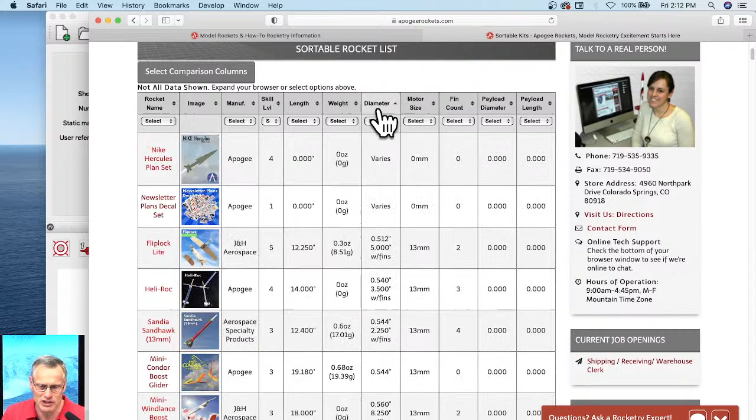So if you're looking for a particular diameter rocket, click on diameter. So then it sorts it from the skinniest to the biggest, and then you could just scroll down. Let's say I'm interested in a 4-inch rocket. So I just keep scrolling down. I'm looking in this column right here for a 4-inch, so I'm not there yet. It's going to be near the bottom. 2-inch, 3-inch. Okay, so now I'm in the 4-inch diameter section right here. So now I could start looking for something that strikes my fancy.

If you want a really cool kit, I would get the Apogee Zephyr, and then you can click on that and it'll take you to the Zephyr page. This is a 4-inch diameter rocket. This is a really good rocket if you want to get your level 1 certification. You can click on the images here and it gives you bigger images so you can see what they look like. You can see that's a big 4-inch diameter kit.

So, Neil, we don't have a catalog, but everything's on the website and you can look at it on your phone while you're in the bathroom, which a lot of people do, they're paging through something or they're scrolling. That's the reading room, right?

Anyway, back to this. So there's two ways to do this. One way is to create a design file for each of the different configurations, and personally, that's what I would do. But some people want to just minimize the number of things that are stored on their computer. So they want just one design file, and then they want to swap engine mounts between that. And so what's the fast way to do it that way?

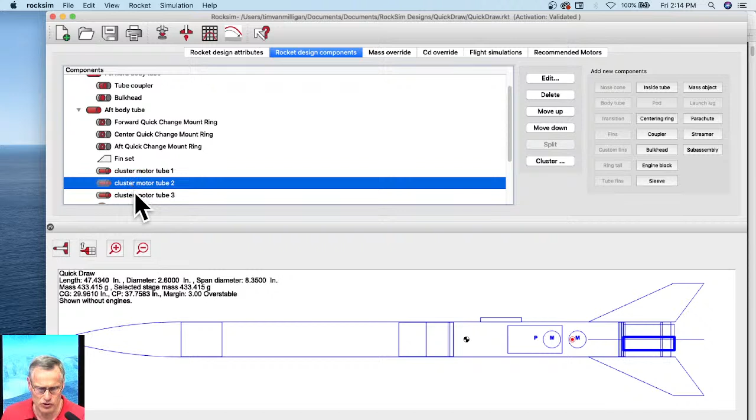So right now this rocket has a cluster of 3 engine mounts in the back. And if I go to the rocket design components tab right here, this lists a parts tree of all the components in the rocket. And if I click on the aft body tube right here, it will expand it, and you can see there's a lot more parts down here. So I have cluster motor mount tube number 1, number 2, and number 3. I've got a whole bunch of centering rings in the front and removable centering rings back here. We've got a lot of stuff, and so we're going to add all this stuff to a sub-assembly.

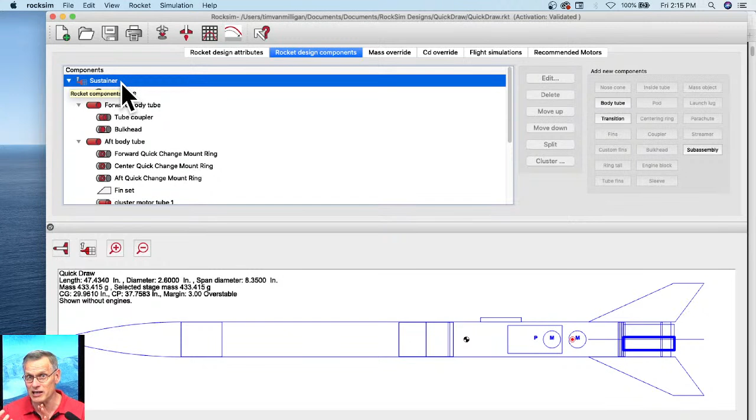So what is a sub-assembly? Consider it like a collection of parts. If you're in the parts tree right here, if I collapse this, this is a collection of parts. And so a sub-assembly is going to be another collection of parts. And then the nice thing about it is I can save it like I save a design, and I can take it and put it into a different rocket.

So the process of doing sub-assemblies is first we're going to create the part holder, the container, like this sustainer right up here. We're going to create that first. Then we're going to add parts to it. And then once we get all the parts added to it, we're going to save that. And then we can go into a different design and load in that sub-assembly file into the rocket.

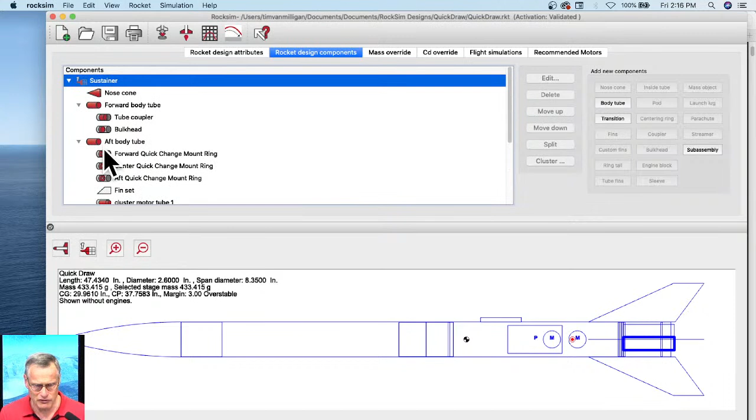So first you have to specify where in the rocket you're going to put it. Because it's a sub-assembly, really it could be anywhere. But I'm going to put it down here in the bottom of the rocket because that's where my mental imagery is of this sub-assembly. So I have to find a part that I can add it to, and you'll see over here on the right side there's a button at the very bottom called sub-assembly.

And if you click on the wrong component, you can see that it's grayed out, that I can't add it. So I can only add it to certain items, like body tubes. I can add it to a nose cone. I can't add it into a coupler. I can add it into another tube, but not a coupler. So I'm going to add it to this tube right here, the aft body tube. So I need to highlight it, then come over here to sub-assembly, and click on that.

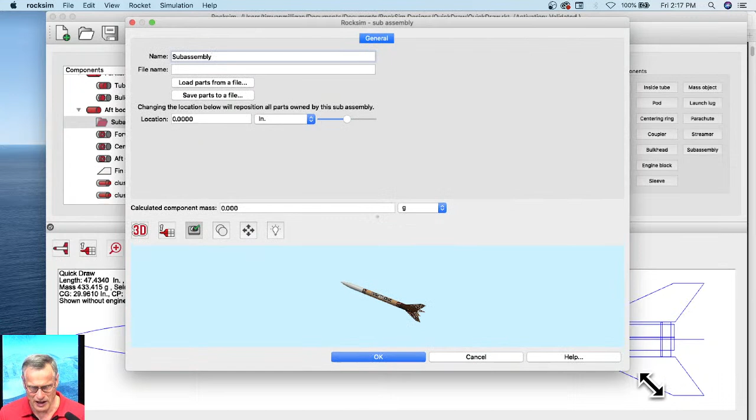And it's going to give me an alert that says, is the new sub-assembly to be owned by the selected body tube? And I'm going to say, yeah, the body tube owns it. Okay, so now it created it, and it's thinking about it. Then it brings up this screen right here, and this is where we're going to name our sub-assembly. I'm going to start out with a single engine motor mount, so I'm going to call it 1 by 29 millimeter quick change motor mount.

And I can give it a file name. I can load parts from a file or save parts to a file, but right now I'm just going to leave that alone. And it's asking me for a location. If I click on 2D, it's going to be somewhere in here. Right now you can't tell where it is, but we'll see it later, and I can change the location later. I think right now it's right at the front of the tube, which is right here in the middle of this tube coupler.

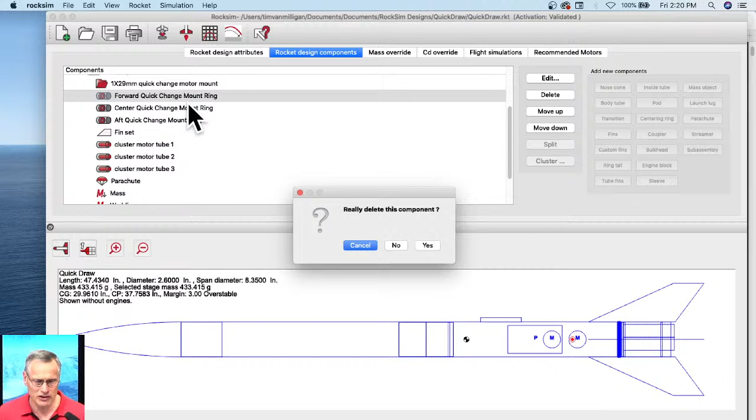So I'm going to do a cut of this part. When you do a cut, it actually saves it to temporary memory, and then you can paste it. So I'm going to do a cut. And it's going to say, do you really want to do this? I'm going to say yes. So I took that out, and now I'm going to highlight the folder here, and I'm going to say paste. To get this little menu, I right-clicked with my mouse and hit paste. And you can see now it put that ring that used to be here up into here.

So I'm going to do the same thing with this one. Cut, say yes, come up here and paste. And it pasted it in. I'm going to do the same thing with this one. Cut, yes, and paste. Okay, so it pasted it in there.

The fins, I'm not going to put in the sub-assembly, and not these cluster tubes, because I'm going to go from a 3-engine cluster to a single 29 millimeter, so I don't want that. But looking at this motor mount tube, right here there were 3 rings at the front. They're just stacked up together, and then there's 1 ring in the back, so I want that ring. It says aft removable mount centering ring, so there it is right there, so I want that one.

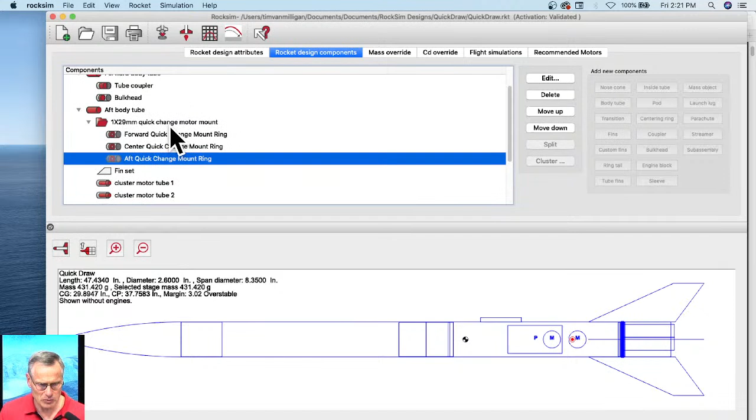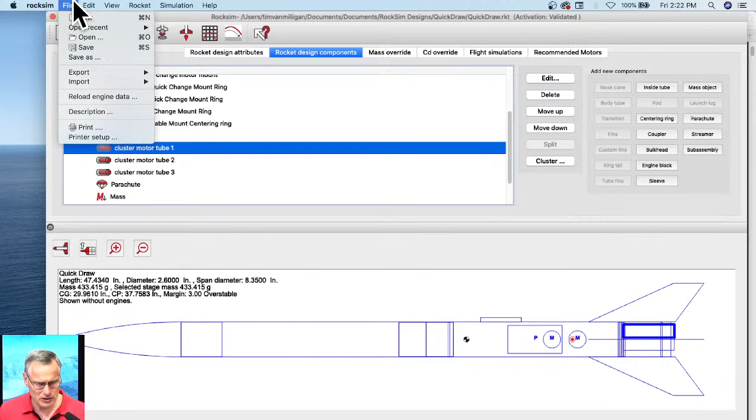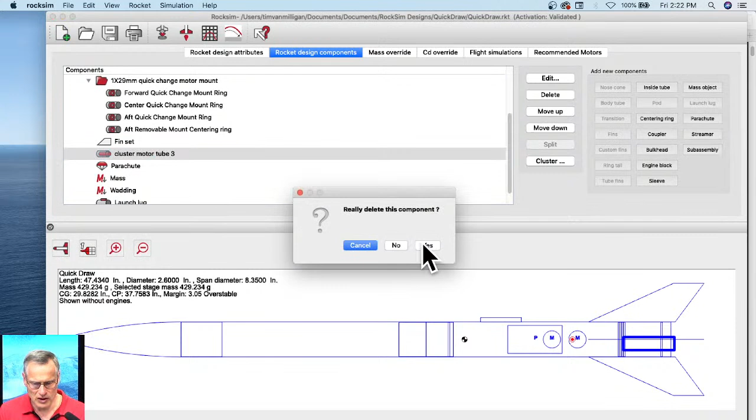So I'm going to cut, say yes, come back up here to the folder, highlight it, and paste, and it pasted it back in. And I think that's all that I want. Now I'm going to delete these 3 cluster tubes right here because I don't need them. So I'm going to do file, delete. I can do a cut or a delete, either one. Delete that, yes. Delete that one, yes. And then delete the 3rd one, delete, yes.

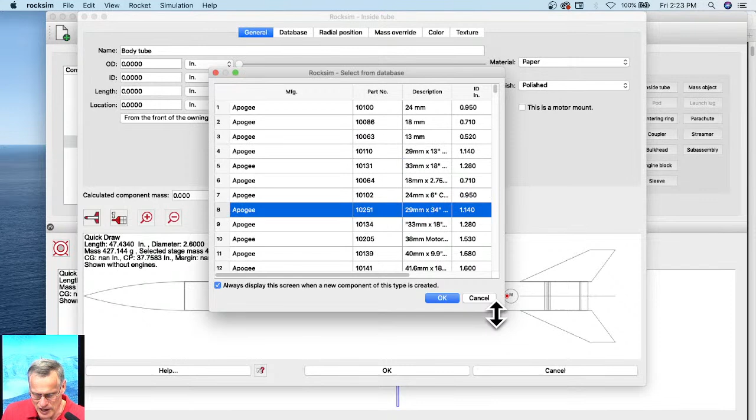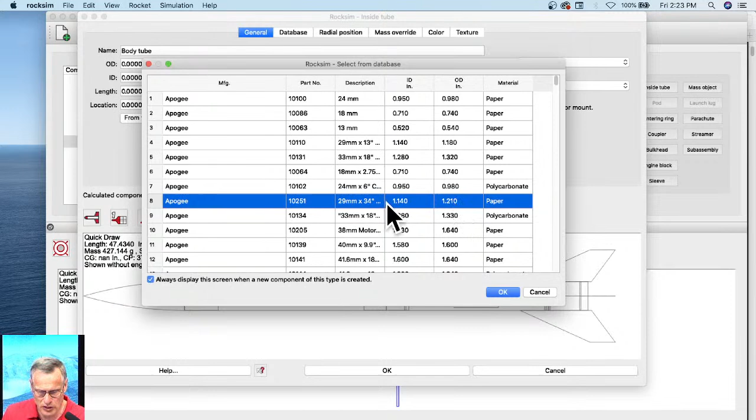And now I need a 29 millimeter motor mount tube. So I don't want that one. I want this one right here, because I know from Apogee that one is a thin walled tube. So the outside diameter is 1.18. This one down here is 1.21, so it's a little bit thicker, because on this particular rocket kit we used a thick wall tube.

So I'm going to say OK to that, and you can see that it put that tube way up there. So here's my tube in blue, and here's my rings right here. These centering rings are positioned back from the tube, and that's probably going to cause a problem. It's not so much a problem, it's just going to cause extra work in the future.

So what I really should have done was move those rings all the way up to the front here at the start of the sub-assembly, because right now they're back here. I'll just go ahead and leave them back here, and then I'll show you where the extra work is going to come. So on this motor mount tube, first I want to move the location. I'm going to slide it back so it's at the front of those rings right there. I think it's like right there.

And then the length, and I think the length is 3.75 inches, because I think the 29s are the same as the 24s, and in the 24s we use 3.75 inches long on that tube.

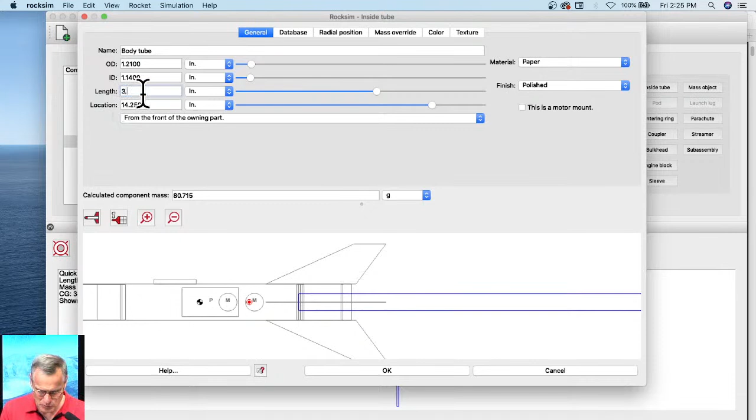So 3.75 inches, and so there's that tube. Let me zoom in so you can see that tube. That's the correct length. That's good. And this is a motor mount tube, and you can see it already selected 29 millimeters. I kind of knew that.

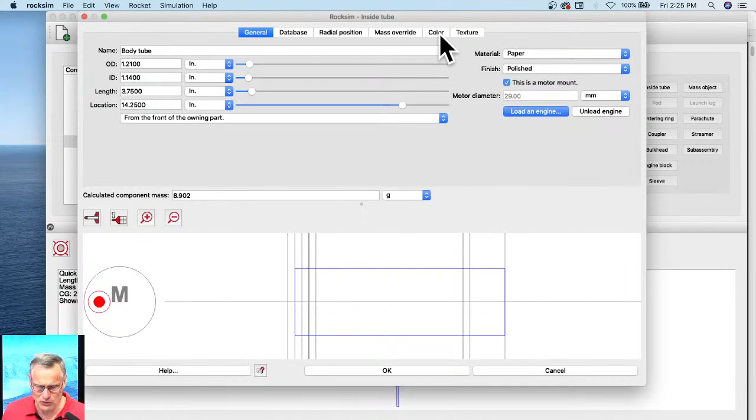I can change the color here if I want. I think I'll change the 2D color at least. Make it purple. And my 3D color is white. I'll just leave that. And click OK. So now we're looking at the back end. Let's look at it from the side view.

So there is that motor mount tube. Also on the motor mount tube is an engine retainer. On this one we used a threaded rod retainer. So let me show you a picture of what that looks like. Let's go to quick change.

Okay, so here are the motor mounts. Let me go to this one. Actually, see, that's a 3x24. I need a 1x29. Here's the 1x29. Click OK. So there that is. And if you click on it, what you see here is this right here. That's a threaded rod, and we bond it to the tube with epoxy. And that holds your rocket motor into the rocket.

If I look at it from the rear view, you can see that there's the rod, and then it's got a little nut and a washer that captures the back end of the motor and prevents it from sliding out. This works really good, and they're cheap. They're cheaper than a screw-on retainer, which is why we used it. We're just trying to keep the cost down.

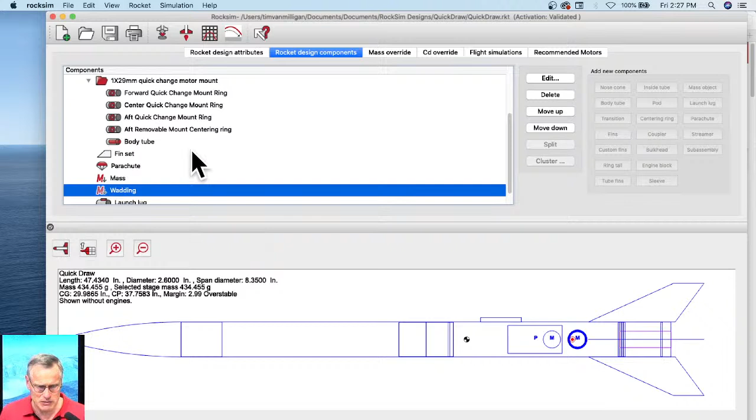So I'm going to come up here again because it's inside of my quick change motor mount, and I'm going to go to a mass object, and I'm going to ignore the database, and the mass object right now is right there. We're going to call it 12 grams, and we're going to move it. I'm sliding it back to about right there where it would probably balance in the rocket. And let me call this the threaded rod retainer. And I'll click OK. So there it is.

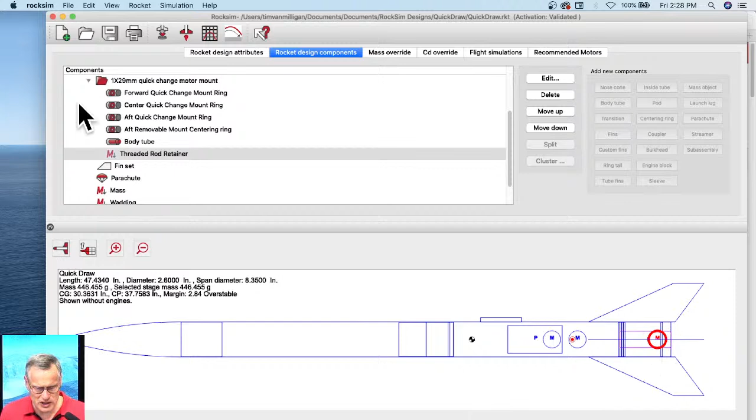So at this point, my quick change motor mount is ready to save. So I'm going to come back up here to the quick change motor mount collection of parts, and I'm going to double click on it, and now we're going to save it. And so now I need to give it a file name, and I'm going to call it the same as the actual name so I can find it. And then you're going to save parts to the file.

So I'm going to do save, and it looks into the last folder that I was looking at. So I'm going to paste in that name again. It should have pasted in there. Oh, it doesn't want to let me paste it. 1x29 millimeter quick change motor mount sub-assembly, and I'll hit save. Holy cow, look at that.

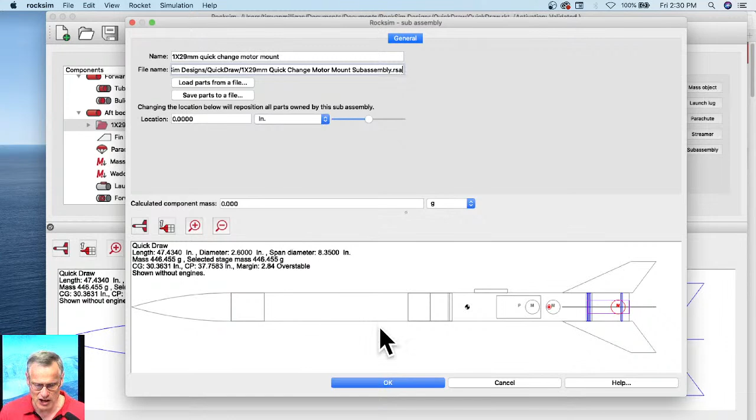Oh, okay, what it was looking for here was the file path. So this is the entire file path. So on my computer, it's in the users, Tim Van Milligan documents. Inside of there is documents, RockSim designs, quick draw, and then the file name, 1 by 29 millimeter quick change motor mount sub-assembly, and then it adds a file extension RSA, which stands for RockSim assembly or RockSim sub-assembly. So it's been saved, and I click OK.

At this point, we can run some simulations. I'm going to just do a save as, because I want to just hold my thing here. So I'm going to call this quick draw 1 by 29 millimeter, so I know what it is, so I don't override the one that I downloaded from the website. Okay. So we can run a simulation here. So now when I go to load motors, I should only see one motor mount tube in here. And I'm going to choose an engine, and I'll just randomly select something.

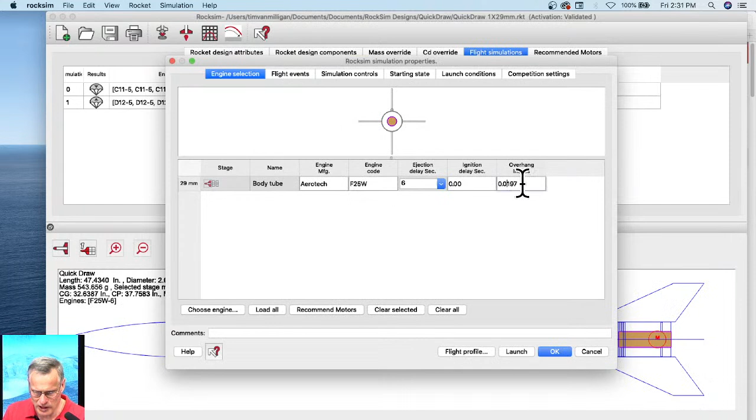Aerotech. Let me sort by engine code. I want to get an F motor, so let's do an F25. Maybe a 6-second delay. Click OK. Engine overhang. I think with this engine mount system, it's going to overhang 0.25 inches, a quarter inch, because that's the thickness of the thrust ring that's on the back of the rocket engine.

Now just seeing what we got here for flight events. Deploying at maximum ejection delay. We're going straight up. And let's launch it and see what it looks like, just to confirm everything is working. So here's the rocket on the launch pad. These black lines right here are called the weathercocking cone. This kind of tells us if the rocket's going in the direction we want.

We want the apogee point to be somewhere up in here. And let's see, when we launch it, the rocket goes pretty straight. That's pretty good. You can see this is the smoke, and it's drifting a little bit. So there's a little bit of wind in this simulation, but not much. And the apogee point was within the cone. So that's a good flight, and it deployed the parachute pretty close to apogee, so I like that also. I picked my delay pretty good.

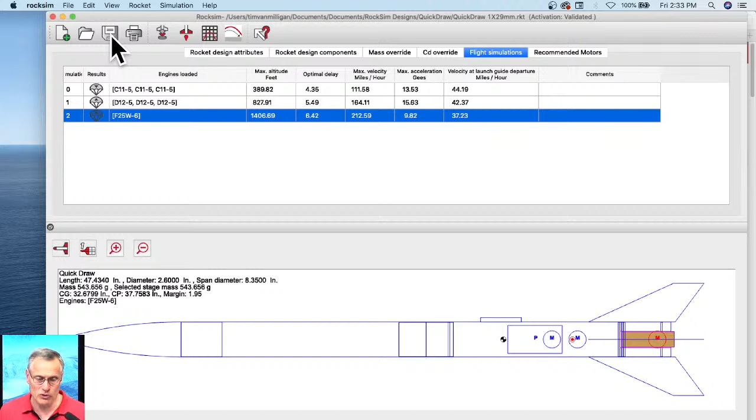And then it's coming down, and it's going to land about 374 feet downrange with a total flight time of just about 70 seconds. So that simulation worked just fine. Okay, so now let's go and create a new design and bring this sub-assembly into this new design. So I'm going to start out by creating a new design, and I'm just going to do a very simple design.

If you're brand new to RockSim, this is how you create a design. Come up here to new design file, click on that. It's going to ask me, do I want to save this? And I'll say yes, because I just ran a simulation. So when we design a rocket, we work along here on these tabs. I'll start with the first tab, and I'll just call it BT-80 Simple Rocket. I'm just going to leave everything else alone. Go to the next tab and start designing. So now we need to add parts to this. I'm going to add a nose cone as the first item. We kind of work from the top of the rocket coming down.

So I'm going to work with an Apogee, and I want a PNC 66, which is a BT-80. That's the hardest part of designing a rocket, is knowing the parts names. I have an advantage because I designed the parts and I know their names, but BT-80 is a standard size tube, and it's 2.6 inches in diameter. And if you convert that into millimeters, it's 66 millimeters. And so that's where this nose cone came in. You can see the diameter here at 2.6 inches. I like the nose cone, so I'm just going to say OK.

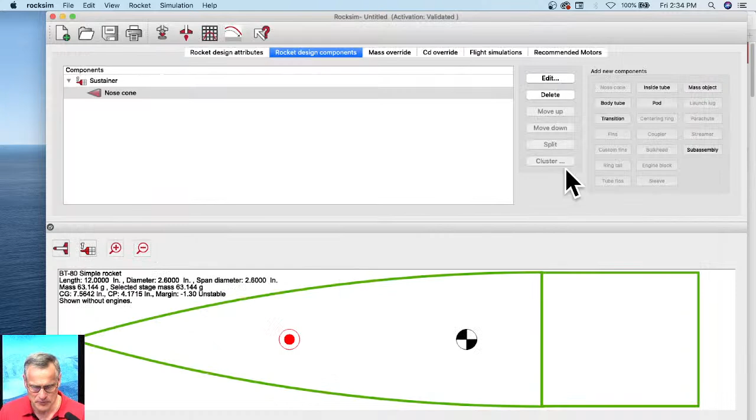Now I'm going to put in a body tube next to that. And again, I need a 66 millimeter or BT-80. So here's a 66 millimeter. I'm going to select that, and it threw that tube in there. It's going to be a little bit short, so I'm just going to lengthen it a little bit just by grabbing the slider. So I'm at 24.75 and I like it, so I'm going to click OK. Let's put some fins on there real quick. So I have 4 choices of fins. I have trapezoid and ellipticals, which are under the fins button.

Custom fins are fins that have an oddball shape. So if I look at this fin right here, it looks like a trapezoid, but you can see it's got a nice curve right there and a nice curve at the back end down here. So that's not a trapezoid. So I can't use fins. I'd have to use custom fins if I wanted to do something like that. But for now, I'm just going to use regular fins. And then you also could put a ringtail on it, which is a ring around the outside diameter of the rocket. Those are really stable. Or you could put tube fins, which is a collection of smaller tubes glued directly to the inside core tube.

I'm just going to do a regular fin, and this will be a simple trapezoid fin. Again, when you create a new part, it always looks in the database, so I'm going to ignore that. And it throws a generic fin on there. And if you like the shape of that, you can leave it alone, or you can start moving these slider bars around. If I change the sweep angle, you can see it sweeps it back. And I can change the semi-span and make it skinnier, and it automatically readjusts down here. It tells me that this is a birch plywood.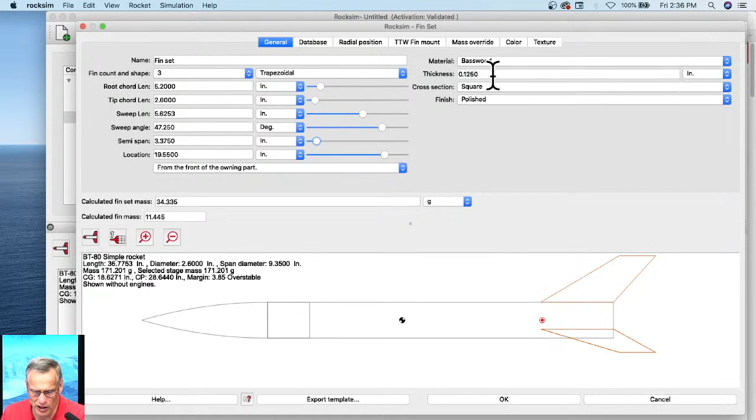I think I would probably like basswood, which is a little bit lighter weight, but not quite as strong as plywood. And if you like that, you click OK. So now we have a generic rocket, and now we're going to add that motor mount into it.

So here's where I'm going to add in a sub-assembly. So this is a new rocket design. I'm going to come over here to sub-assembly. So I'm going to click on that, and it says, is this new sub-assembly to be owned by the selected body tube? And I'm going to say yes. And now I'm going to load parts from a file. So before we saved, now we're going to load it in. So this is where we're loading it in.

And again, it remembers that I was in the quick draw folder before, and you can see that it's looking specifically for files that end in .rsa, which is RockSim subassembly. So that's the one that I want. I'm going to click open, and you can see that it loaded it in there, except for where's my motor tube? Let's click OK. There's the motor tube.

Okay. Now, before I said that there was going to be some extra work involved, well, this is where the extra work is involved, because that motor tube and this mass object, which is right there, when we created the subassembly, they were referenced from the front of the tube. And I think the tube on the quick draw rocket, this aft tube, and right here is the dividing point, is 18 inches. And so when we created the subassembly, we were referencing from a tube that's going to be 18 inches long.

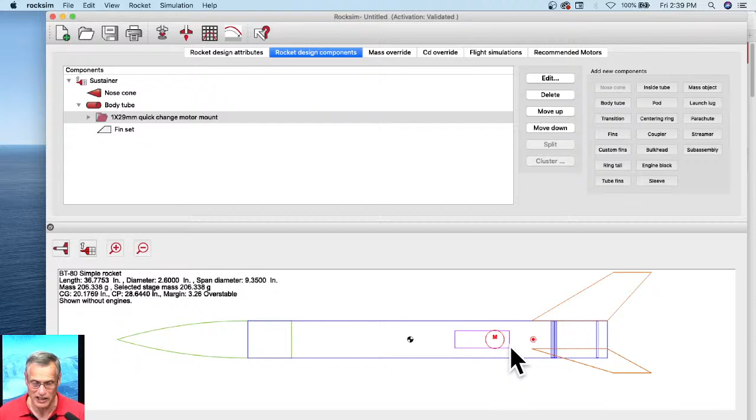But I can adjust it right here by going into the list of parts and finding that motor tube. So here's that motor tube right there. I'm going to edit that tube, and let me change the name of it. So I'm going to call it a 29 millimeter motor mount tube, and I'm going to change the location. I'm going to grab the location slider, and you'll watch it slide back, and it's sliding back to about right there where I want it, and I'm going to leave it right here.

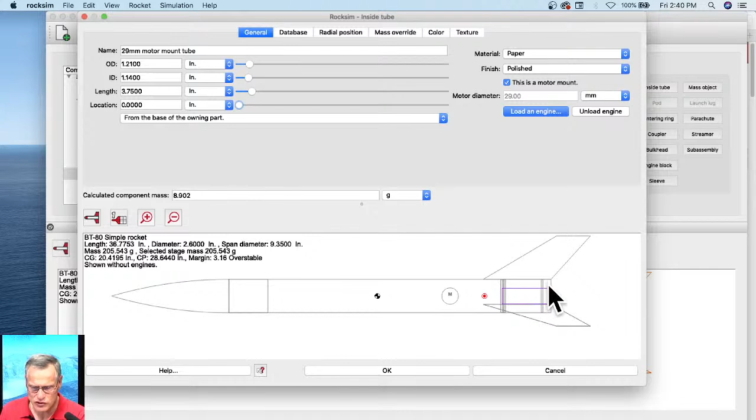I could change this to the base of the owning part, and that is actually probably a pretty good thing to do, because then if I change the length of this tube right here, that should follow it. And I have to do the same thing for the threaded rod retainer. Again, just slide it back right here. I'm going to change it to the base of the owning part, so that it's referenced now 1.125 inches from the back of the tube instead of 20 something inches from the front. So then I'm going to click OK.

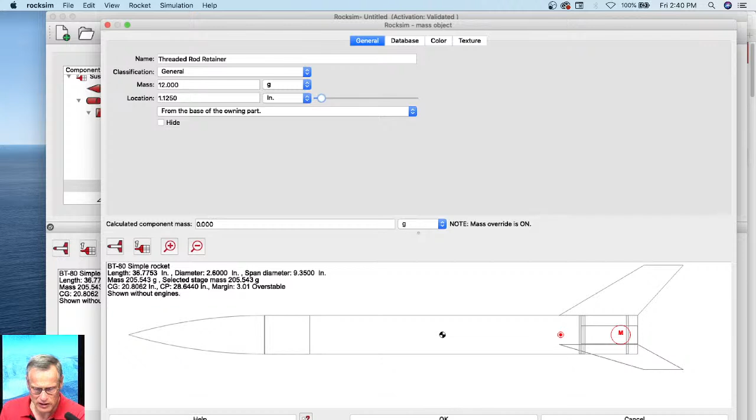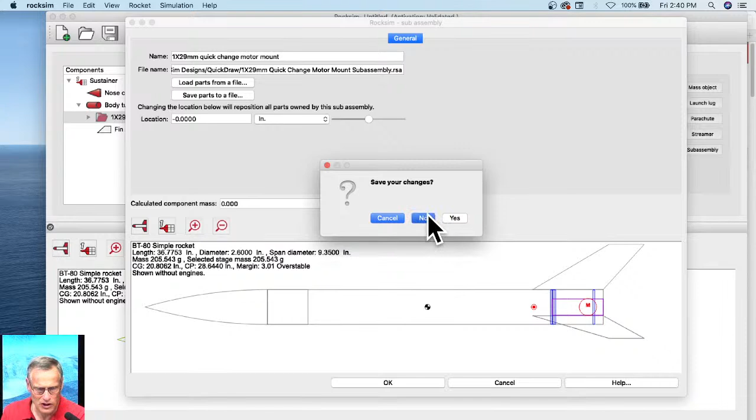So now if I open this sub-assembly right here and I change the location, you can see that everything's moving, which is good. That's what we want. Additionally, if I cancel out of that, save my changes, no, I can go to the body tube, and if I change the length of the body tube, this sub-assembly should move with it.

So if I make this tube a lot shorter, you see everything moved except for the fins, because the fins were not referenced from the back end, they were referenced from the front end. So I should have thought of that, right? I'll just move it back here and click OK. Let me go to those fins and show you where you would change that.

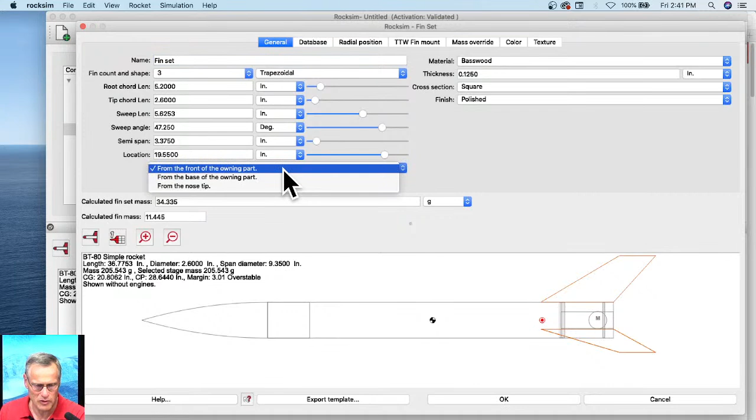So again, if I was creating those fins, edit the fins by double-clicking, and then come down here to location, and you see the drop-down menu. Right now it's from the front of the owning part, and the owning part is this tube. And I'm going to say make it from the base of the owning part, and then click OK. So now if I change the length of the body tube, everything is going to move with it. And that's called designing smart. And click OK.

Let me run a flight simulation here. So I got no flight simulations run so far. I don't have a parachute in here, so this rocket is going to crash, but we'll run it anyway. So it sees the motor mount. I'm going to say choose an engine, and I'll do an Aerotech F25 again. Make it a 9-second delay, although it doesn't have a parachute, so it's not going to do anything different.

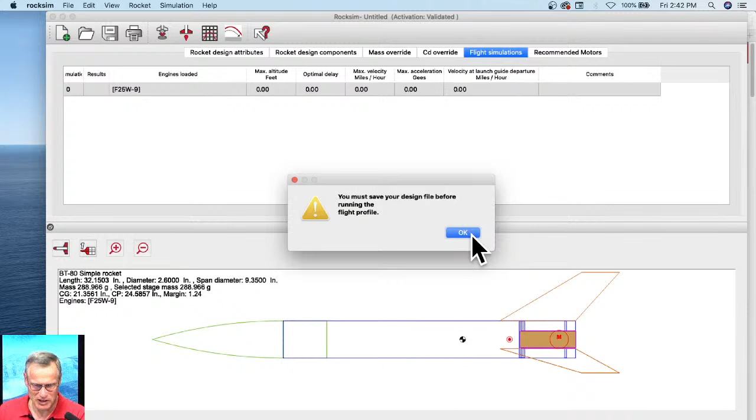It's asking me to save my design. I'm not going to put it in that folder. I'll just leave it in there. We called this the BT-80 simple rocket. Hit save. Now it runs the simulation, and we can see the rocket right here. And this one should go up and come pretty much straight down because it doesn't have a parachute in it.

Okay. Without a parachute, it's just going to come screaming down. And I'll stop it right there and drag it here. This time it only was 25 seconds in the air versus about 70 seconds previously. So again, that simulation worked. Let me go back to our original design. Let me save this one. See this right here? That means crashed rocket.

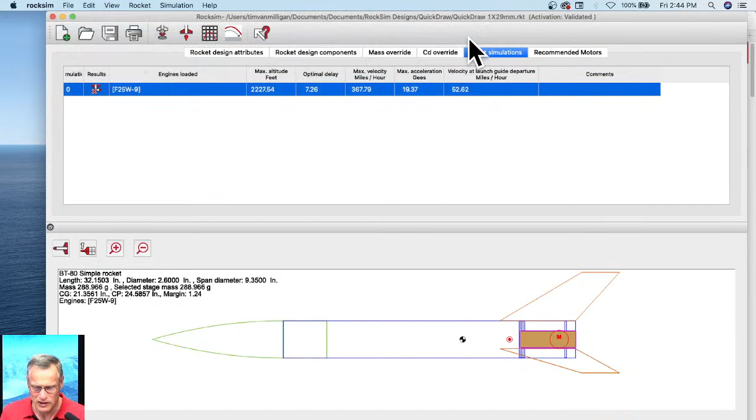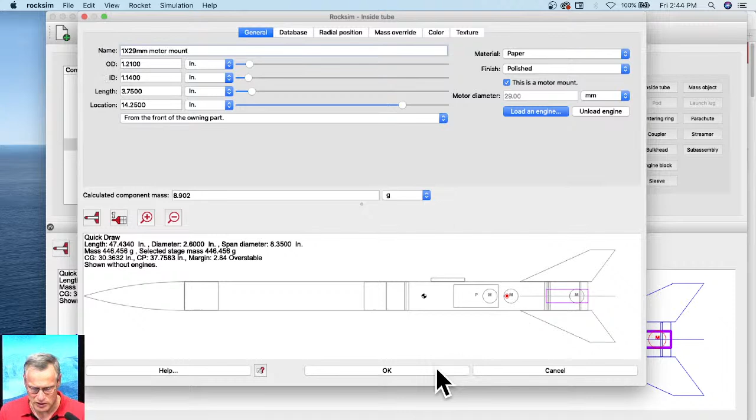I'll save that one. And I'm going to do File, Open, Recent, and we're going to look at the Quick Draw 1x29. And I want to correct that sub-assembly here, because this is our original sub-assembly. And what I want to change is those locations. So here's the body tube. Change it from the base like we did before, and we're going to call it the 1x29mm motor mount. And click OK. And then the threaded rod retainer, let's do that one as well. From the base of the owning part, click OK.

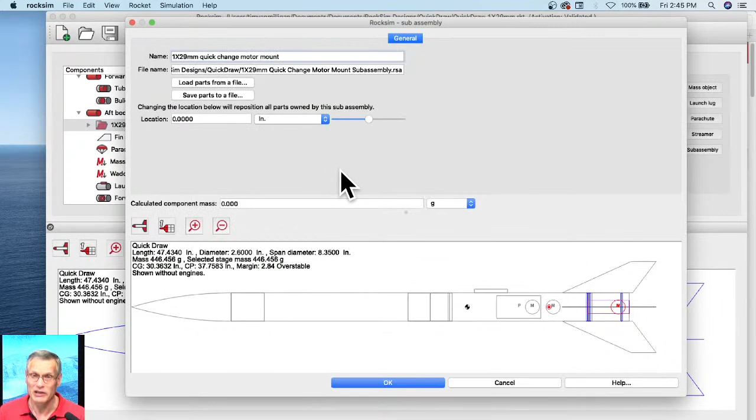And now I'm going to go back to my sub-assembly, and I'm going to save it again. And I'm going to leave everything the same. It's asking me to give it a new name, but I just clicked on it and it brought that up there. And so I should get an error message when I hit the save button that I'm overwriting this file, but that's okay. So I'm going to hit save. And there's the error message, and I'm going to replace it. So now I just replaced that subassembly. So the next time that I open it up, I can just drop it in. Okay, so now I'm going to click OK. So now we got the single 29.

My next one I want to do is a dual 29. So I'm going to have two rocket motors side by side, and they're both going to be 29. And it's really easy to do this in RockSim, because I already got the single 29 right here. So I'm going to highlight this motor mount tube right here. And now I could duplicate it. I can duplicate it two ways. I could do it like I did before, where I cut it and then added it back, like a copy paste. Or I could come over to this button right here called cluster. And this is what I recommend that you do.

Go to cluster, click on that, and it's going to launch what's called the cluster wizard. And so now we're designing a cluster engine mount, and it's going to walk us through the process. First, it's going to say select the cluster pattern. We can change the rotation of the tubes in the motor mount. We can specify naming convention for the tubes. And then finally, we'll finish by creating the new components. So click continue down here.

And I have a choice of any of these patterns. I can do a 2-engine cluster, a 4-engine cluster, which you can see is not going to fit. 6-engine cluster, 3 is not going to fit. The only one that fits is 2. So that's what I'm going to start with. And I'm going to say continue right here. And you can see I can zoom in. And these tubes don't quite touch the outside, but they're touching here on the inside. I like that pattern, so I'm going to click continue.

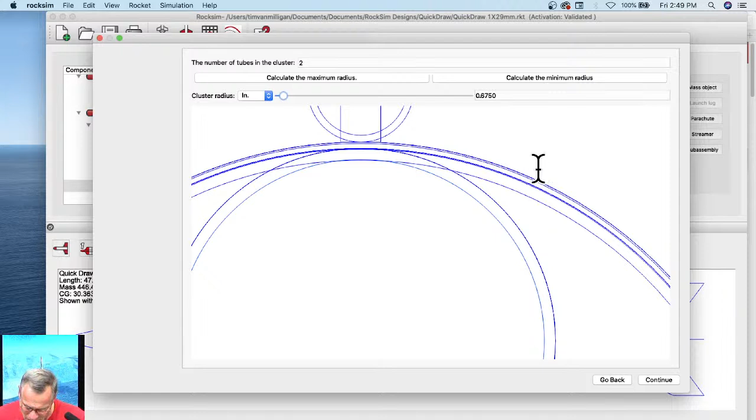And so, see, now I can change my cluster radius. I can grab this and calculate the maximum radius. See the maximum radius. You see right here, it looks like it's interfering, but this inner circle right here, that's one of my centering rings, or the tube coupler that's in the rocket. So that's what it's seeing here. My actual tube is the first, well, there. That's the inside diameter of the tube.

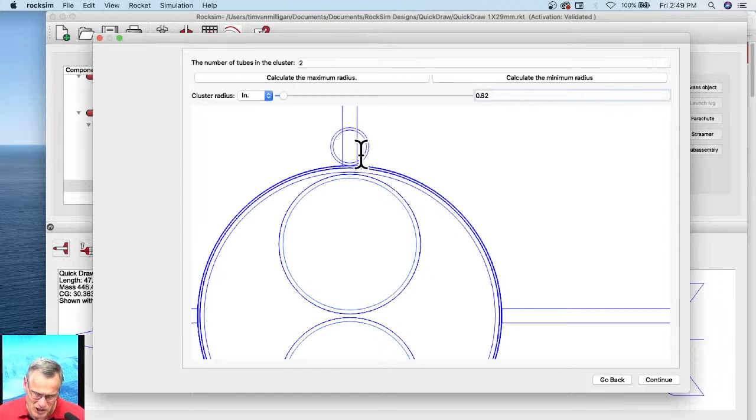So it automatically calculated that for me, and I want to bump that down just a little bit. Let's make it 0.6. So now it's 6 is not there. 0.65. I'll make it 0.62. Okay, so that looks good. I got a little bit of room there for my centering ring, and there's a little bit of room between the tubes so that I can slide in the two motors.

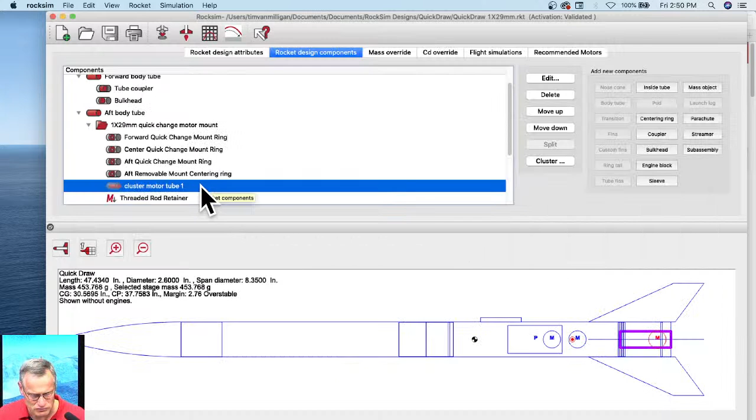And I'll hit continue. And again, do I want to change the rotation angle? It doesn't really matter. I'll make it 90 degrees so it's side by side, and continue. And if you like what it looks like, hit done. And now it should have created, oh, there it is right there. Cluster motor mount tube number 2 and cluster motor mount tube number 1. They're just not together right there. There's a threaded rod in between them. And if I look at it from the rear of the rocket, you can see there's two engine mounts in there, which is really good because

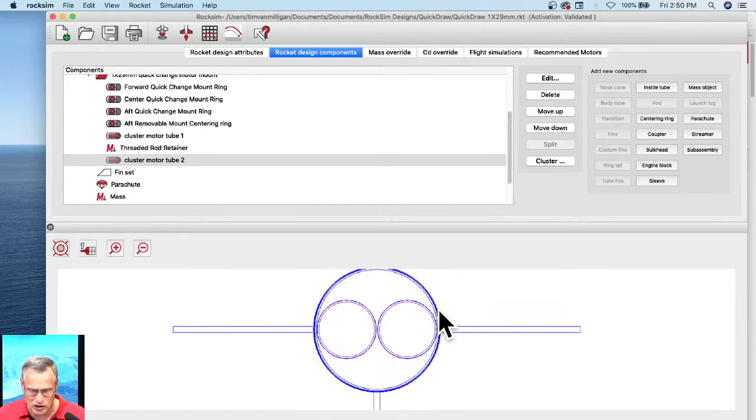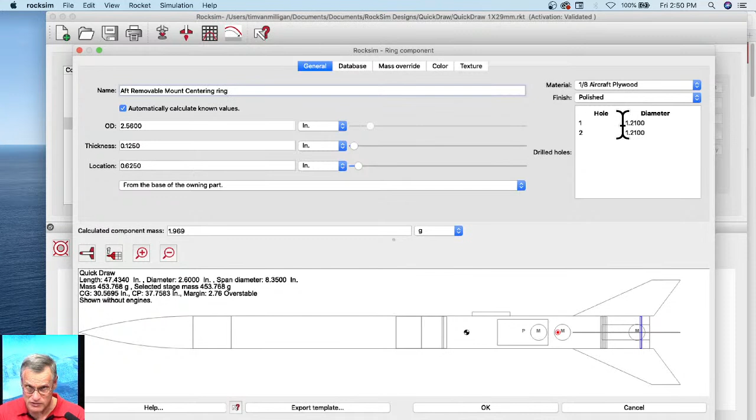that's what we wanted. And if I look at my centering rings, so my aft removable centering ring, if I edit that, you'll notice that this screen has changed. So we did a copy and paste before, but when you have a cluster, it will show you that there's 2 circles in there. And that's important because if we wanted to actually build this ourselves, we need to create a centering ring pattern, print out the pattern, and we want those holes in the right spot. And so RockSim is automatically calculating it.

And I could say export the template here, and it's going to export out an SVG of that centering ring. I'm going to call it centering ring so I know what it is. Click. Now this is a 2x29, not a 1x29. Hit save. And it exported it. And where did it put it? It put it into the quick draw folder. So if I wanted to look at that, I would have to open up a browser window and go to that folder where it's stored, and it was inside the quick draw folder.

Here's the quick draw folder, and here's the centering ring, and I can open it, and it's in SVG, which is scalable vector graphic, and that's a drawing graphic. So you would need something like Inkscape to open it on Windows, or Adobe Illustrator. And I have Adobe Illustrator down here, so I'll just drag it into Adobe Illustrator quickly and show you what that looks like. If it wants to load that. Yeah, it wasn't started.

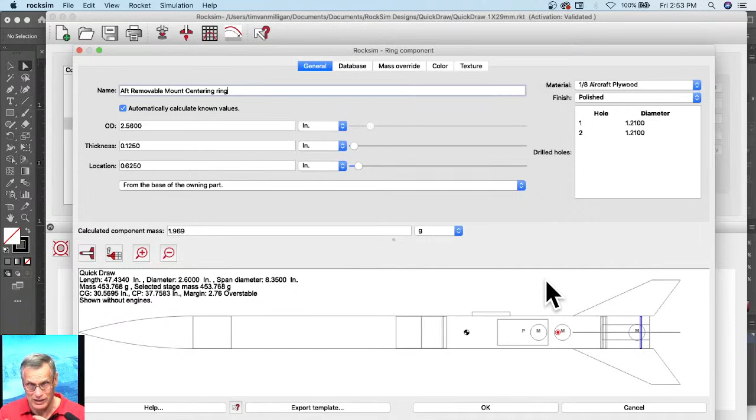That's why it's important when you design the rocket to click on that cluster button, because that way the centering rings will automatically adjust. Okay, so now I'm going to click OK here. So we have our centering rings. Let me go back to a side view. And now we need to save this again. So this time it's a 2x29 millimeter quick change motor mount. And when I save it, I want to have it as a 2x29 millimeter. And I'm going to hit save.

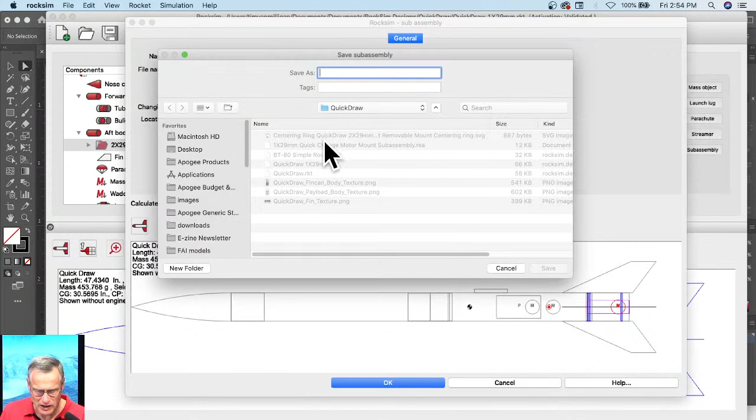And I'm going to select that because then I don't have to type everything all over again. 2x29 millimeter quick change motor mount sub-assembly.rsa. Hit save, and now it has saved it. Click OK. So now we can use it in our other design.

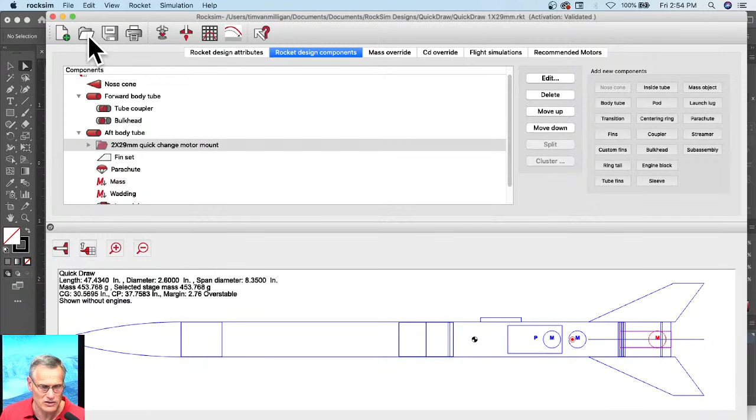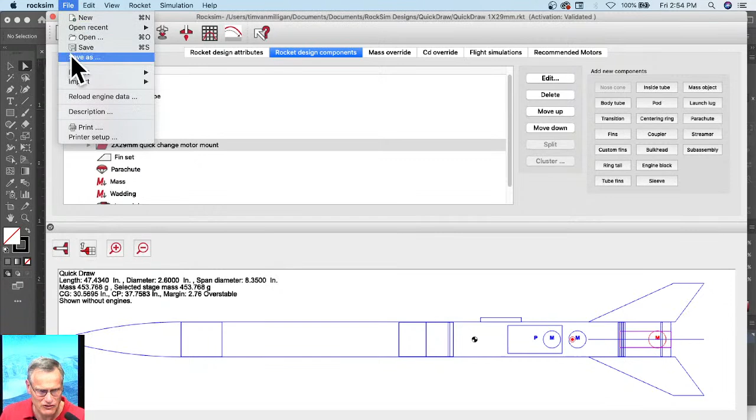So if I open my previous design, the BT-80 simple rocket, click open there. Do I want to save the changes to this one? And I'm going to say let me cancel. Actually, I do want to save this, so I'm going to do File, Save As. I don't want to do Save because then it would override this 1 by 29. So now I'm going to do this one as a 2 by 29.

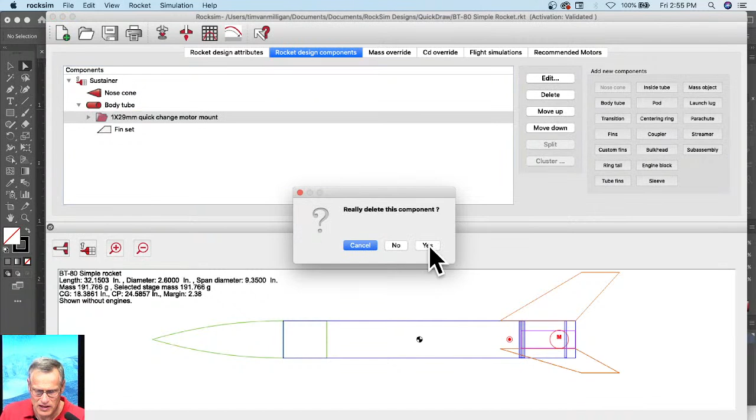Hit Save. But now if I go to my simple BT-80 rocket right here, open that, and we're going to delete this subassembly and we're going to add in the new one. So again, I'm going to delete it and say yes, and it deleted everything. I'm going to select the tube, click on the subassembly button, and it's asking me, is this tube owning it? I'm going to say yes.

And now I'm going to load those parts, and it's going to be the 2 by 29. See, now here's the 1 by 29. Here's the 2 by 29. Click open. And my motor tube's in the wrong spot, but my mass object is in the right spot. So how did I not do that? Click OK.

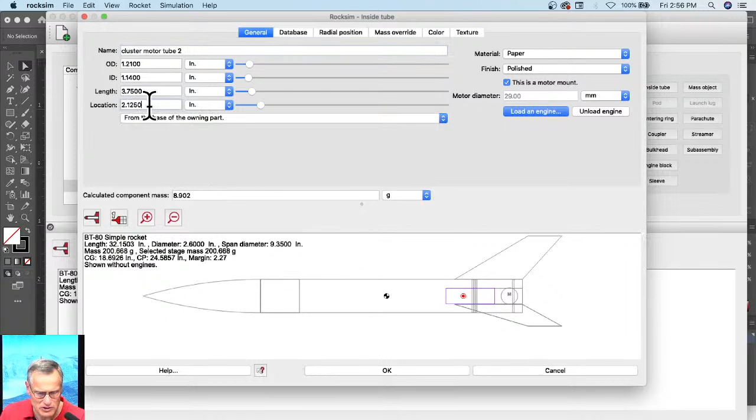But I can adjust that. I'll probably have to do it twice. See, it says from the front. It should have been from the base. That was one tube. Here's the other tube. From the base, it's going to be 0. Okay, so now we have, if we look at it from the back end, there it is.

And then we can run flight simulations by going up here to prepare for launch. And we have to choose the motors. I'll just choose the F-22J. Let's do a 7-second delay. Click OK. It loaded in one of them, and we need to load it into the other one. To do that really quick, you just hit Load All, and it just duplicates that motor in all the tubes that have that same diameter.

And then we'll do the flight profile. See where this one goes. This one also crashed because it doesn't have a parachute. I'm going to just use the slider bar and see how high it goes. You know, it goes 3,200 feet. And it comes screaming down to the ground.

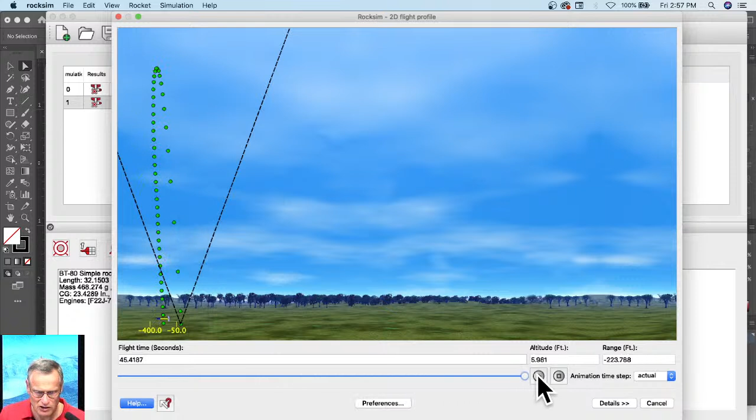Well, it actually didn't. This one came down sideways. You see that? It came down sideways because we have more weight in the back of the rocket. So that shifted the CG, which is very interesting. That's cool. RockSim saw that. I didn't even think about it.

So our first one with the F-25, a single motor, went 2,200 feet. With two F-22s, it went 3,309 feet. And if I wanted to, I could do that for 3 engines. I could do it for 4 engines, and then I'd have sub-assemblies that I could swap back and forth. You know, the sub-assembly doesn't have to stay in the rocket. It can move from one rocket to another.

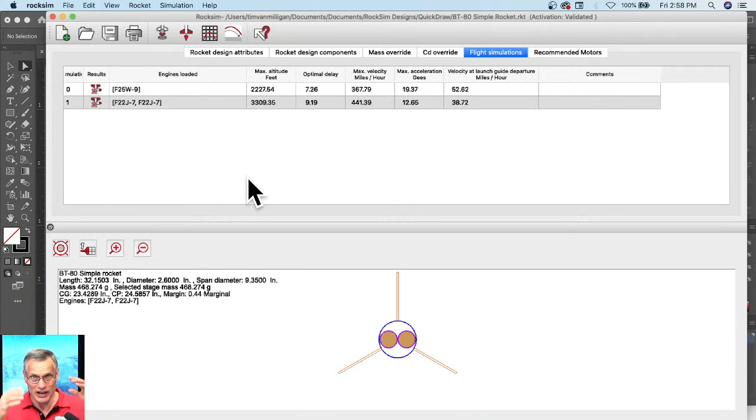So I have 2 ways of opening these designs. One, I could save the design as a whole file, which I showed you. Let me open that up. So here's the one, quick draw, where is it? Here it is, the 1 by 29. Here's the 2 by 29.

The original design is this one right here. That's a 3 by 24, although it doesn't have a sub-assembly in it. Everything's built into there. And then finally, here are sub-assemblies that we can move around from one rocket to another. So that is how you do sub-assemblies in RockSim. And I know I had more questions here, and we're getting low on time, so let me see what we got.

Johan says the quality of the sound is good today.

Good. Okay, Sturk03 says, I started with the sustainer body first and then realized I did not start with a nose cone. When I went back to add a nose cone, it was grayed out and I could not select the nose cone. How do I get one? Okay, so what he did, let's start a new design. I'm not going to save it this time. So he started the new design.

So he went to the Rocket Design Components tab, and instead of choosing a nose cone, he started with the body tube. And I'll choose this, it's a BT60, so I'll click OK. So here's my tube, and click OK. So now on my parts tree, I have a body tube, but I don't have a nose cone. And what he says is when he comes over here, he's right. It's grayed out. You can't click on it.

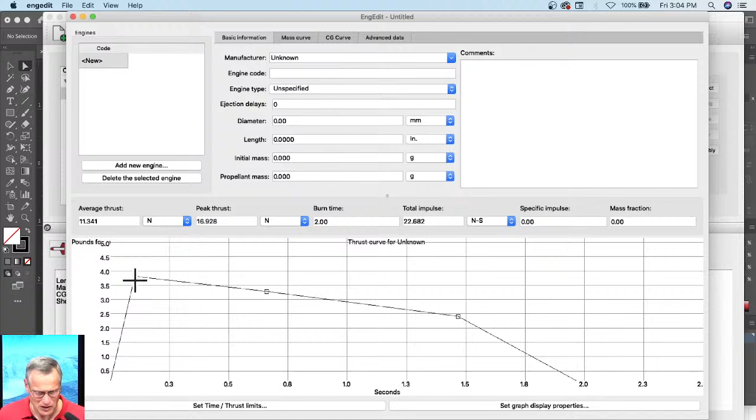Anyway, I should be able to just click on here. There we go. And that will create points that I can move around and create a thrust curve. And this thrust curve right here is just a little bit bigger than a D motor. A D motor has a total of 20 newton seconds, and we're at 24. Again, you just have to know that because I've been in rocketry a while. I'm just trying to drag this point down.

22. I want to make a D engine. 21. I got too much thrust. There we go. Now we're under 20. So now this is a D motor. Manufacturer unknown. I don't know what he was calling his, TSI or something. So that's the manufacturer. I just made that up. I have no idea what that is.

Okay. Engine code. I know because I've made engines that anything greater than 10 and less than 20 is a D motor. So my engine code is going to start out with a D, and then usually there's the average thrust after that. And here it calculated it for me at 9.6. So this is going to be a D. I'll round that 9.6 up to a 10. So it's a D10. And the engine type, I'll say single use.

And then I can give it ejection delays. So I'll give it a 0, like it's a booster motor. I'll give it a 5, and then a 7, and maybe a 9. And I'll also give it a plugged, a P for plugged. That means that there's clay on the front end, that there's no ejection charge. And I'm going to call the diameter 24 millimeters.

I'll give it a length of 75 millimeters. Then you have to give it a mass, and I don't know what a D engine weighs, so I'm going to cheat and go to the Apogee website. I'll type in a D12 for Estes, and I'm just looking for the weight.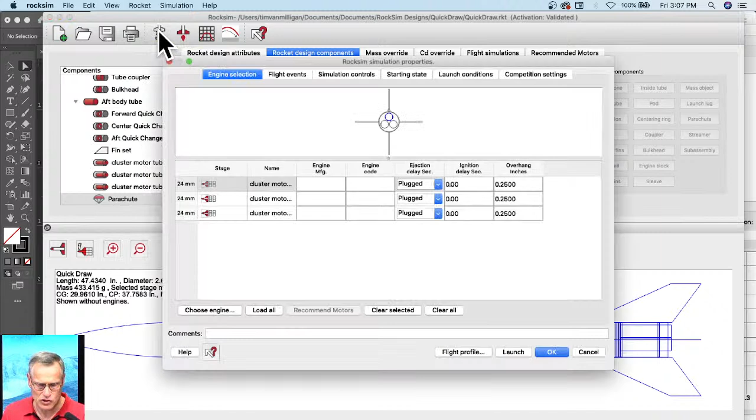It's drawing that. That's why it's taking long. Let me go to a side view, and then it'll be a little bit faster. Now I know that these motors right here are 24 millimeter. So if I go to prepare for launch, oh, before I do that, cancel, I got to load that motor into RockSim. So this is how you load a motor into RockSim.

You go to File, and then you go to Import, and you're going to import engine files. You can import database files or engine files. We're going to choose engine files. And then we have to find our engine file. And this is why I put it on my desktop. So I'll go to the desktop. And there's the D21, and you can see it's highlighted, and I can select it and click open. And so now it tells me it copied that motor into my database.

Okay, so it's in the database, and now I need to move it into my active database. So you can have a database with all kinds of engine files, maybe a whole bunch you never use. And so that's where it is right now, in the whole bunch of engine files on your computer somewhere. So now we have to tell RockSim, move it into my folder where I'm actively using it. So you highlight it and then you say add. And so now it added that D21 engine right here. Click OK.

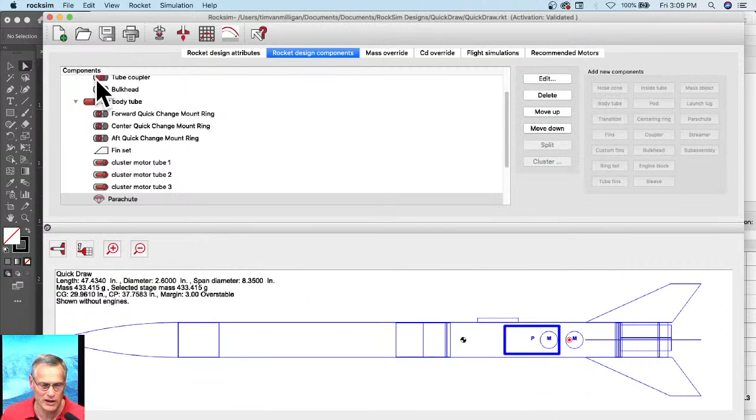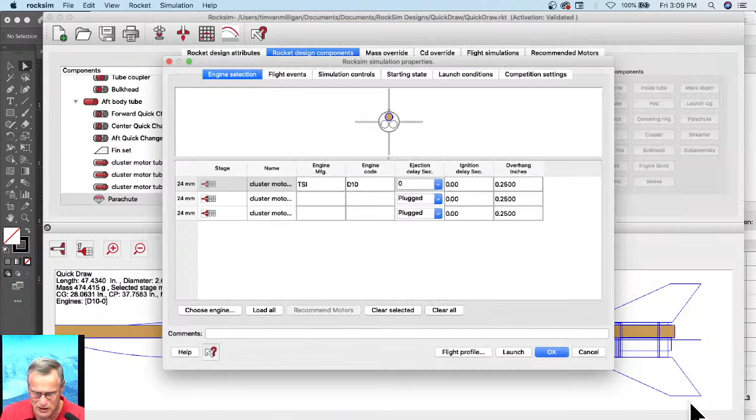So now we're in the rocket design. We're going to go to load engines. I want to choose an engine. And what do we call it? A D10 from TSI. There it is. Length of 75 inches. Hopefully that's in millimeters. Burn time of 2. Total impulse of 19. Average thrust, okay. Yep, that's a bad thing. Click OK. See, it thinks it's 75 inches long. It should have been 75 millimeters long.

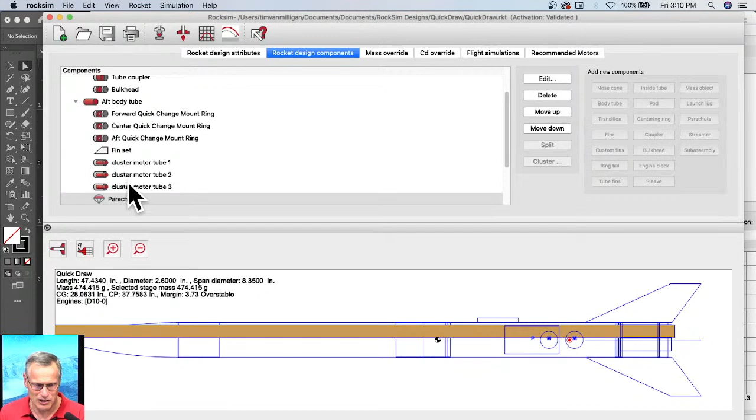Let me go back to engine edit. Oh, see, I said 75 inches. So that was my fault. If I would have made the engine file right, it would have been correct. But you get the point. I've loaded that engine in there, and I could load it into the other clusters as well. Again, highlight it and say load all, and it loaded it into all 3 of the engine tubes. And I can hit launch, and it launched it. It used a 0-second delay.

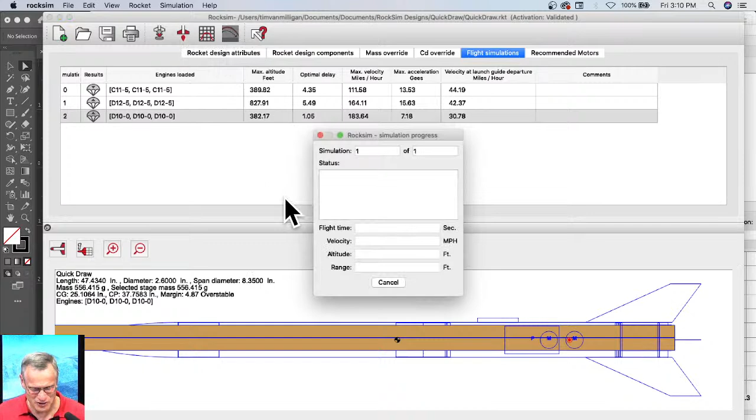It only went 382 feet. So something went wrong. I wonder what happened. Let's look at it in the 2D flight profile. Did it go unstable? No. Oh, since we used a 0-second delay, it opened the parachutes on the way up, right at engine burnout. So there's nothing wrong. It's just I set up the simulation wrong. I used 0-second delays instead of actual delays.

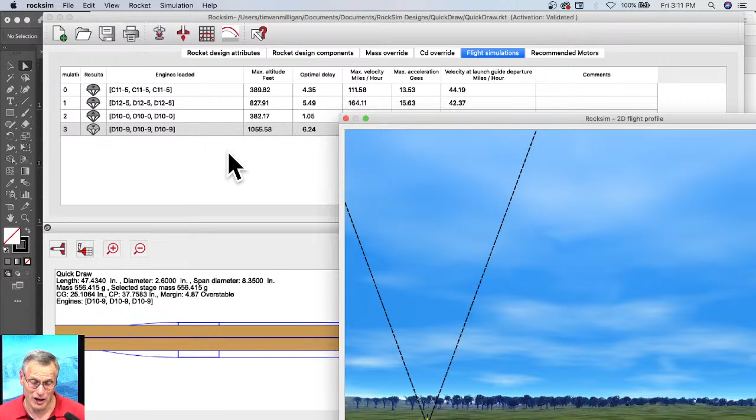So if I went over here to my drop-down list, you can see I have custom plugged, 0, 5, 7, or 9. I can load all. Now they're all 9 seconds, and if I hit flight profile this time, it's going to go a lot higher, and I saw that right here, 1055 feet, so a lot higher. So actually it's a good launch this time.

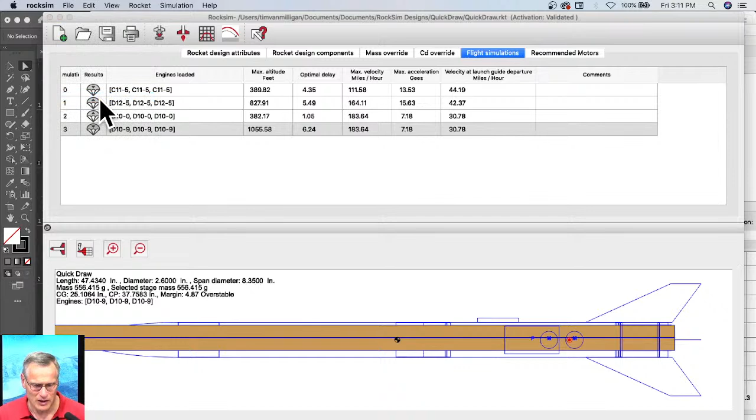So now that motor that's in my database, I don't want it in my database, so I'm going to go back up here to File. I'm going to go to Reload Engine Data, and Reload Engine Data brings up that screen that we saw before. So I'm going to take that D21 engine and remove it, click OK, so that the next time I try to load an engine, it's not going to find that D21, or that D10. See, it's not in there.

So hopefully, Johan, that answers your question. I know that went really quick, but we were running low on time.

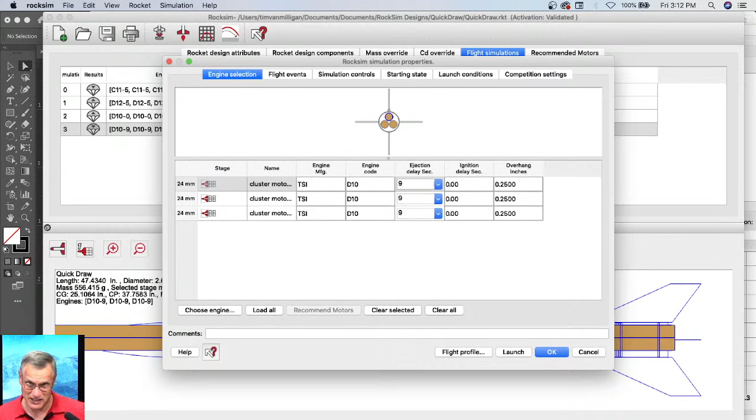Johan said, I bet Michelle is behind the scenes so Tim won't screw up today. I screwed up, but Michelle is not behind the scenes. Michelle will be here next week because I'm not going to be here, so she will take my place.

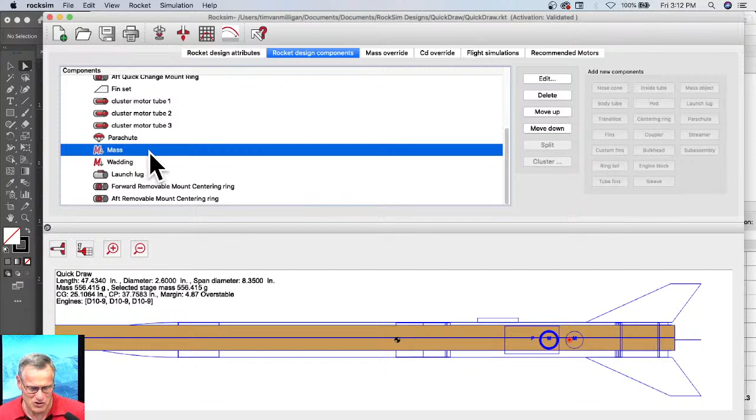Carlos says you should use better names for mass objects. Remember when I created my mass objects? That was in my sub-assembly rocket. You know, like this mass right here. What the heck is that mass? I have no idea. This is what he means by you should use better names. Oh, I can see that mass right there is actually going to be a shock cord. So I can change that name so I can tell what that mass object is.

Alfred Indy says Tim should wear his white uniform with a cowboy hat on the quick draw video. I used to have a cowboy hat and I don't know what happened to it. We had NARAM, I think it was NARAM 30 something here in Colorado, in Penrose by Estes, on a piece of land that Vern Estes owned, and we all wore cowboy hats as part of the range crew. It was a lot of fun.

There's a whole bunch of comments. Rick DeFossa says, can sub-assemblies be saved into the parts database? Yes, you could, but there's no sub-assembly database like there is for nose cones. So each sub-assembly is saved like a design. Putting it where the parts databases are stored is just going to make it hard to find, because if you know anything about RockSim, those parts databases are kind of hidden. So I wouldn't put them there.